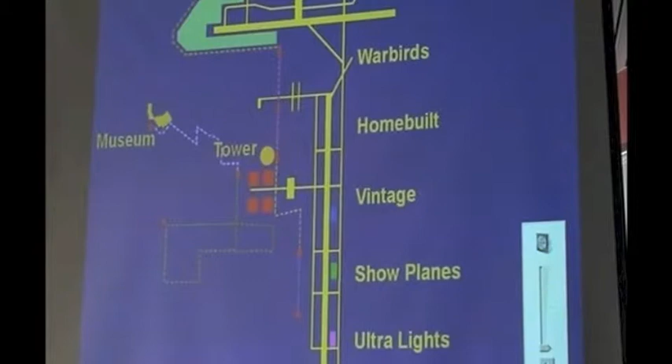There was also the museum, which had a free bus ride over to it, which is only within walking distance. But to get round to all of those and spend half a day in each of those areas really takes up somewhere near half your week. So half the time available is gone just getting around there.

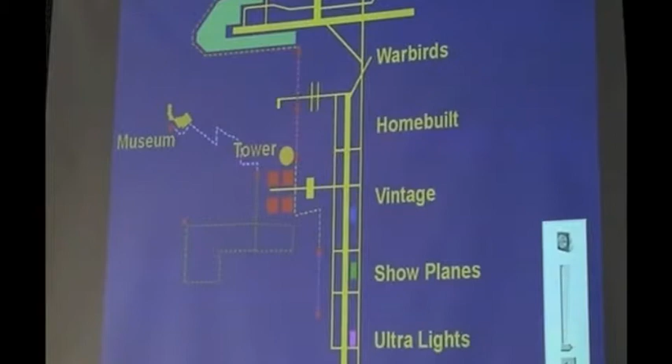The organisation, the air traffic controllers, handle up to 300 aircraft an hour, and they land on the runway on coloured markers. As you've probably heard from a previous speaker, Peter, who has flown in there a number of times, you just don't answer radio calls, they tell you what to do. The faster aircraft are at 2,300 feet, and the slower aircraft at 90 knots are at 1,800 feet.

They're the type of aircraft you can see, all sorts of aircraft, you name it, they're there. The attractions: joyrides, trade displays, flying displays, air shows, seaplane base. Something to do every moment of every day and night.

The attendance was 540,000. They say there were 25,000 campers on the aerodrome. 4,000 plus volunteers were there to help. They didn't work all day, every day - some of them came in for a day or two and did a little bit of help and then took off again. But there were over 700 commercial exhibitors showing their wares.

That's the man who started it all, Paul Poberezny. He got the show underway in 1953, and so he started what's now become the biggest air show in the world.

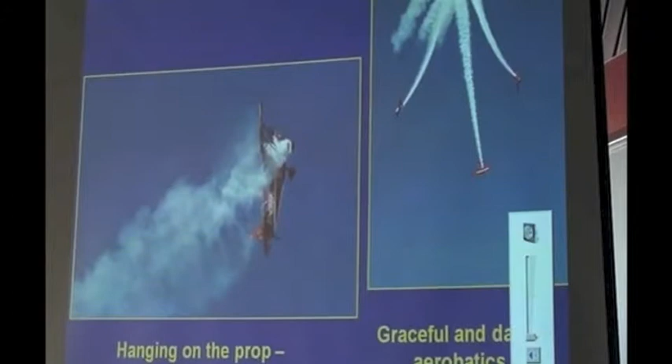This was a delight to watch - Beechcraft doing aerobatics, no more than 2.2 to 2.5 G, rolls, loops, stall turns, you name it, all under about 250, 300 feet. The Shell aerobatic team always put on a marvellous display, and that was an absolute gem of a display.

These chaps flying heavy metal L-39s - we had one of them here in the collection down the road some years ago - put on a masterly display. Their station keeping was just out of this world. I thought it was as good as I've ever seen.

Of course, the Red Bull chopper was there, upside down in the right way, doing all sorts of fancy manoeuvres. And there was a night aerobatic display - you don't see that very often. And of course, aircraft with showers of sparks and lights coming off them throughout the event, quite a delight to see.

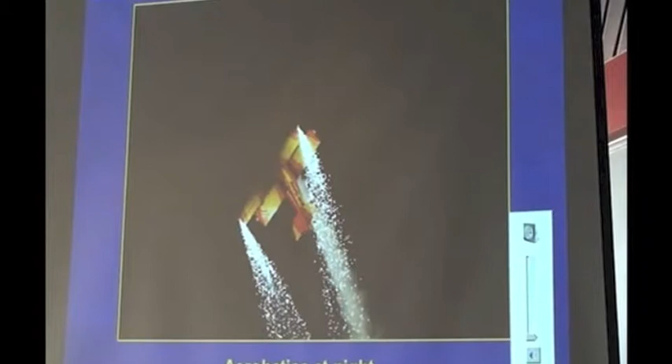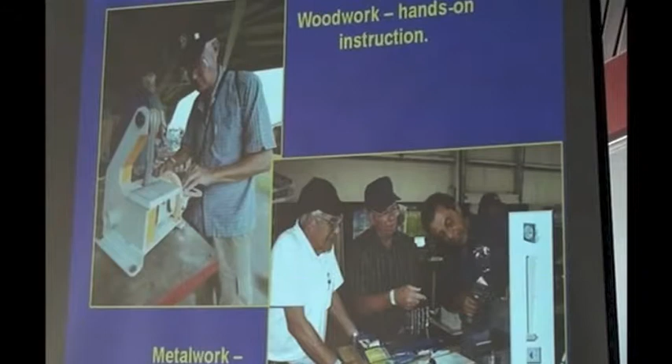Trade displays, you name it, anything to do with aeroplanes, it was there - some attractions to wake people up. Workshops - you can probably learn how to do almost anything to do in aviation by going to one of the workshops.

There was a tribute to Bob Hoover, who's getting on in years now, but he was there talking. Rob Liddell, who some of you know, was also there in his company - Rob and he are very good friends. That's the Old Yeller, the Mustang that he flew for many years in displays. The North American company was in trouble, and Bob Hoover decided that he would help the company out, and after he started his displays in the Mustang and the Shrike, sales went up 8 times - so he almost personally saved the company.

There's a fly past of an F-86 Sabre and the Shrike aircraft, which was the aircraft that Bob particularly flew to the limit in air displays throughout the United States. Of course, not him, but someone else did the typical display in the Shrike.

Not that this bloke did, but Bob Hoover used to, at that stage when he was flying, say 'wheels up for landing,' because he's upside down. Poke the wheels up and then invert the aircraft and land it correctly.

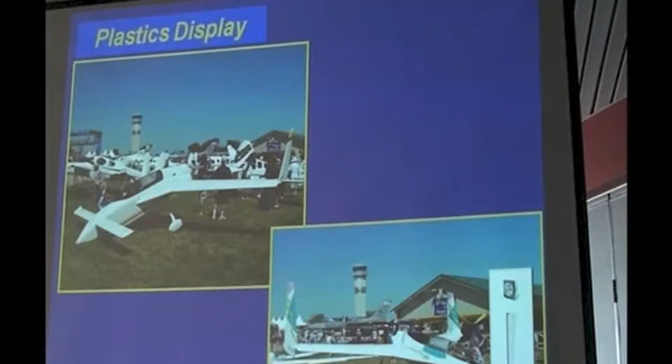Burt Rutan recently announced his retirement, and so the Experimental Aircraft Association put on a tribute to him, and people with these aircraft had come from all over America to display them. All shapes and sizes. The one at the bottom there, I'm not quite sure what sort of prop clearance you'd have in that. You wouldn't want to come in too heavily in that, I don't think.

And because of the engine being at the back, he wasn't very happy with the noise that it made, so he had to design propellers to make them sound all right. All of this added to the expense.

There's an aircraft with 2 fuselages and 1 engine in the middle. I can't understand why you'd ever design anything like that. And there's another one with the canard up the front, joined on to the main plane, maybe for rigidity, I don't know why. And this is the most unusual aircraft I've ever seen.

It's called the Boomerang. I was a bit slighted by that, being associated with Australia. But it's a twin. One engine is on the main fuselage and the other one is on a separate fuselage. Both wings have a forward sweep. That's why it's called the Boomerang.

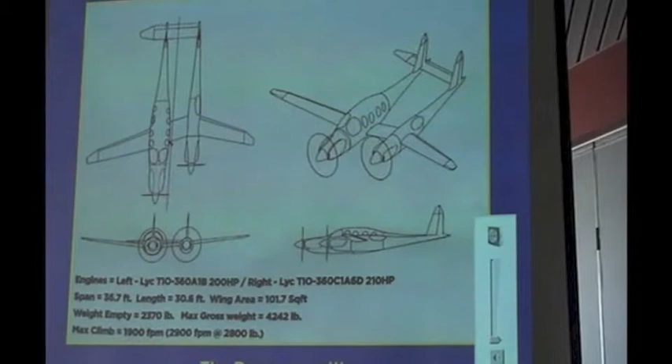And you might see from that diagram there how the wings are forward swept. Each engine has a different horsepower. Each prop has a different diameter. Goodness only knows why you'd ever design anything like that. That's it in flight, the Boomerang.

He also designed this with the Piper Company, and they withdrew it after a while. Beechcraft, sorry. He promised he wasn't going to heckle.

Bizjets, any number of them there. This is only a few. The Honda Jet always grabs attention. I don't know how far it is developed, but it was certainly flying there. Flew in, flew around on a few occasions during the day, and flew out.

It was the centenary of naval aviation. The first naval carrier landing and takeoff took place in 1911. And so the Navy was well represented, both by the Navy itself and by people who had restored aircraft. And that's the Curtiss Pusher, a replica of the first American naval aircraft to land and take off.

I heard the talk by the pilot. One pilot was talking, but there were 2 of them there who fly it. And this bloke said, 'We toss to see who flies. The winner doesn't fly.'

So there we are, Texans, Hellcats, Trojans, Corsairs, Bearcats, and a Swordfish. I don't know where that popped up from, but it was a bit of a surprise to see one there.

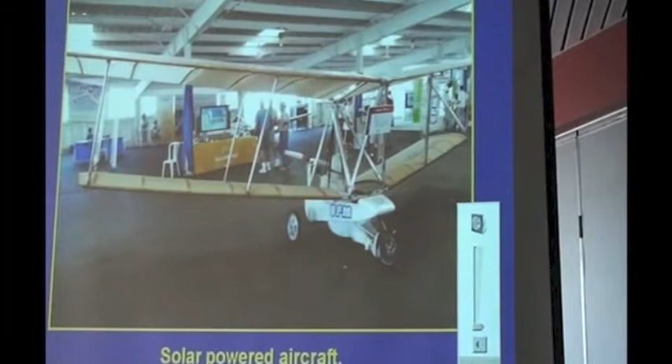The future, well, there was a solar powered aircraft there. Didn't see it fly, but they tell me it has. And there's an electric aircraft there as well. High density propellers on aircraft, they're becoming fairly common these days.

But one of the highlights was the Boeing 787. A marvellous looking aeroplane, and it was a delight to see. Very quiet in its operation.

Rolls-Royce engines in that one. They have a choice, either Rolls-Royce or General Electric engines.

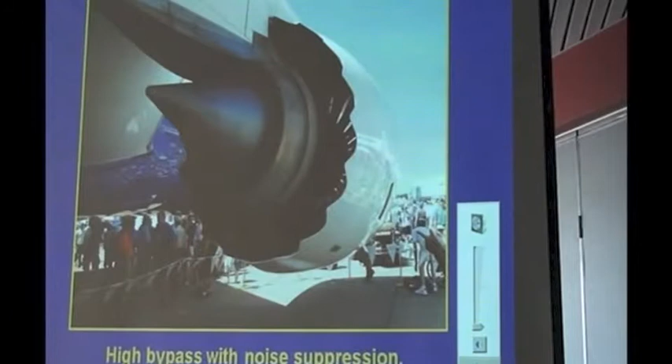That's the engine from the back, and you can almost see through some of that. So it's a high bypass engine, and the frilly edge on the back end of the engine there is to counteract noise.

That's it in reverse thrust. You can see that halfway down the engine it's opened up for the reverse thrust to take place.

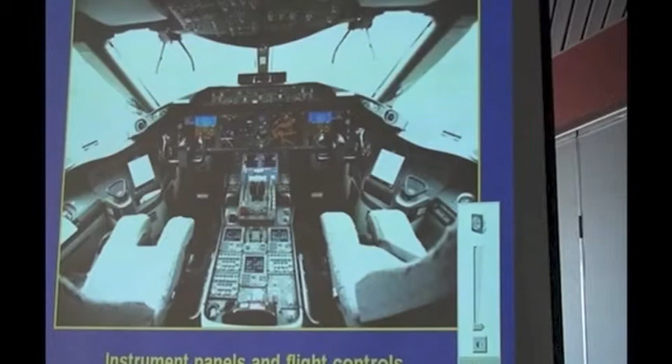That's the cockpit. None of us got inside. Harry O'Neill got within about 10 in the queue when they cut it off, so he missed out. He spent an hour in the queue and then missed out.

That's what it looks like before it's painted, and that's the composite material. So the entire fuselage is pretty much composite. The wings are aluminium and metal.

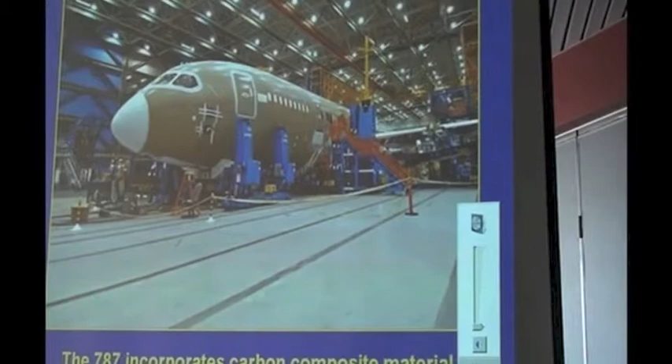That's the interior. Looks very nice, but economy class looks very much the same. Doesn't matter which aircraft you're in.

And that's it on departure from Oshkosh, and I was particularly impressed by the lack of noise as it sailed away.

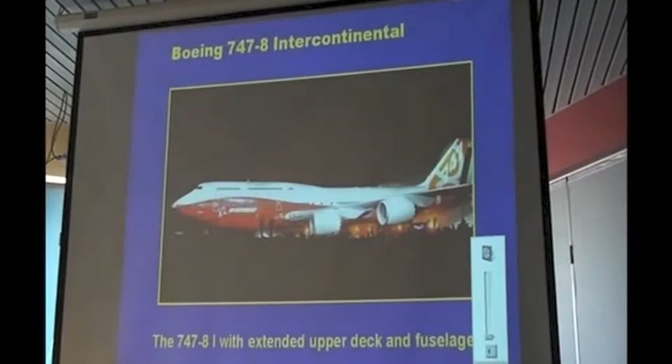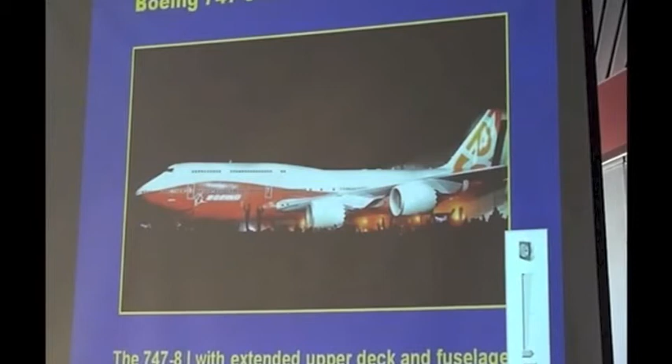That's the I model, the 747-8I, meaning intercontinental. And you'll note there that it's got an extended upper deck. So as well as having the extra 30 feet plugged into the fuselage, it's got the extended upper deck, and it carries around about 470 people against 550 in the Airbus. So it's Boeing's answer to the Airbus A380.

If you look carefully at these photos, you'll see that it has the same engines as the 787. So rather than having different engine types for different aircraft, it's all the same. So there's a benefit there.

The cockpit layout is exactly the same as the 787. So the two aircraft, which are going to be the lead sales in Boeing in coming years, are very much the same from an engine and a cockpit point of view.

Is that a dimple in the front, or is that a shading in the paintwork? I think it's a shading in the paintwork. I don't think it's a bulge or a dimple there.

I've had to enhance these photos. They came out in a funny sort of way, and maybe that's got a bit of me in it. I would think that if we went back a little further, you wouldn't see it in the fuselage of the other ones. So that's probably not realistic.

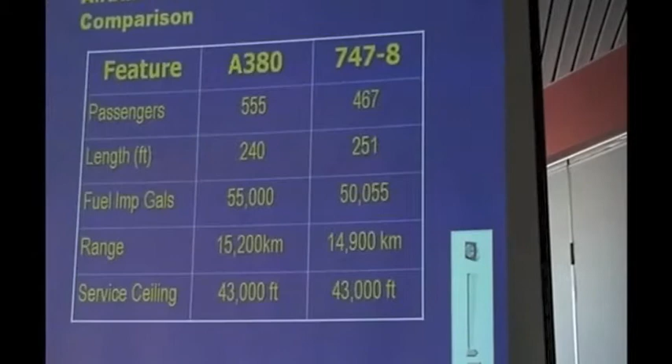The 747-8 carries about 470 people against 550. But doesn't carry as much fuel, travels almost the same distance when it's packed with fuel, and they cruise at the same service ceiling.

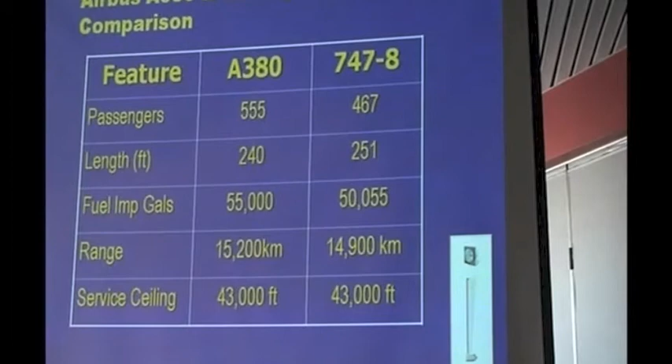So that's a comparison of their cockpit, of their cabins. The 747 is a bit narrower at the top, and that makes the difference in the seating capacity of them. But I think we'll probably find that there'll be some of those on the line in a few years' time.